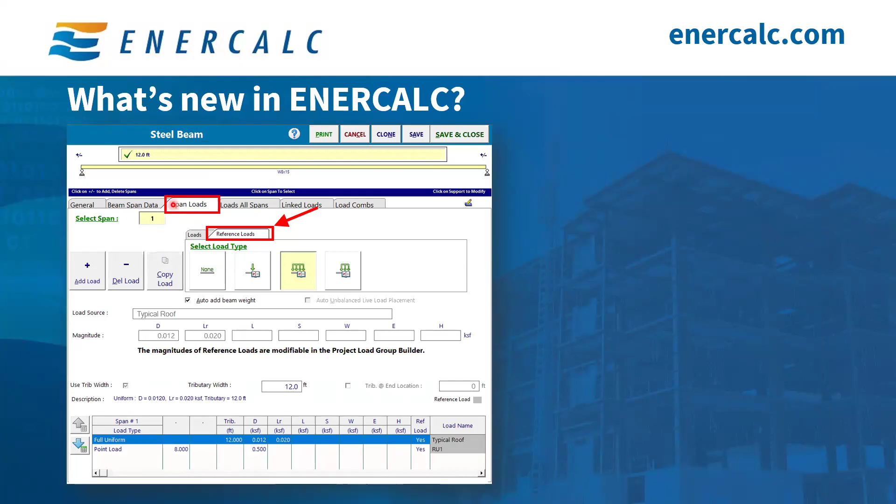Currently, reference loads are supported in the wood, steel, and concrete beam modules, as well as the composite steel beam and the steel beam with torsional loads modules. If you open any of these supported modules and navigate to the span load tab, which is the tab where you input your loads, you will see a new tab right here that says reference loads.

Here we can select the load type. You can see here you can put a reference point load or area load or whatever. So you can select the load type, and that will open the same window that we looked at earlier. So you see we have typical floor load, you have typical roof load, and you can add as many as you want, and you can make them as unique as you want.

And then once you click on it and you add that selected group, then it will automatically populate inside here. And you can see here they're grayed out because you can't adjust them, because they are linked to that master load that you have in the reference load group.

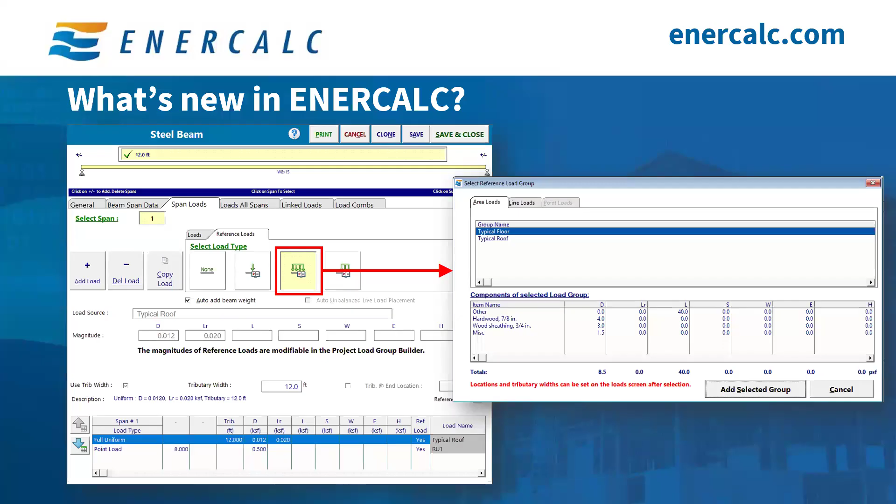And you can simply just retrigger the calculations. The way to retrigger the calculations is the same way that we trigger recalculations for linked loads. You can recalc these calculations in bulk by just clicking on this button right here. So this is, of course, an exciting update, allowing users to create typical load groups that can be referenced across the calculations in their project, and of course, bulk update them in case particular floor loads change or you want to implement that change in multiple calculations.

Another exciting update is the ability to adjust load graphics in some of our beam modules. So steel beam, wood beam, and concrete beam now allow load graphics and labels to be adjusted in the 2D diagram. This, of course, will help users manipulate the annotation so that the numbers are not overlapping and everything is easily legible and you can read it clearly. This is how it used to be, as you can see here, and that's what you can do.

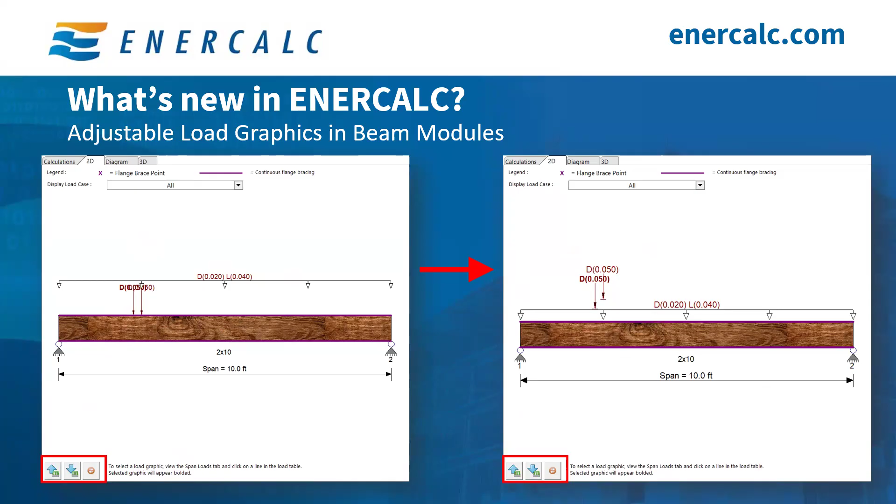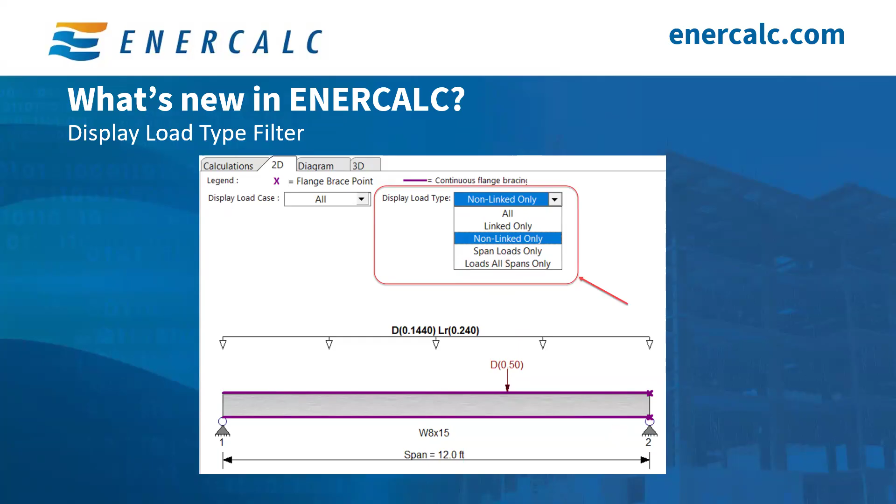Furthermore, we recently added a filter in that same 2D tab that helps the users display the specific load type they want. So loads are grouped by load type. So you can see here the loads that were applied, the loads all span, the span loads only, the non-linked loads, and the linked loads. So you can filter the display here just to show the loads that you want to see if you're trying to isolate a specific group.

Last month, we shared that access to Jack was now available in ENERCALC, and this month we are excited to share another update. The Ask Jack button on the main toolbar now opens a dedicated window, which provides direct access to Jack, the ENERCALC AI support chatbot, without requiring a web browser or navigation to ENERCALC.ai. Jack is trained on ENERCALC documentation and product data, so he's a great resource for quick answers anytime you need them.

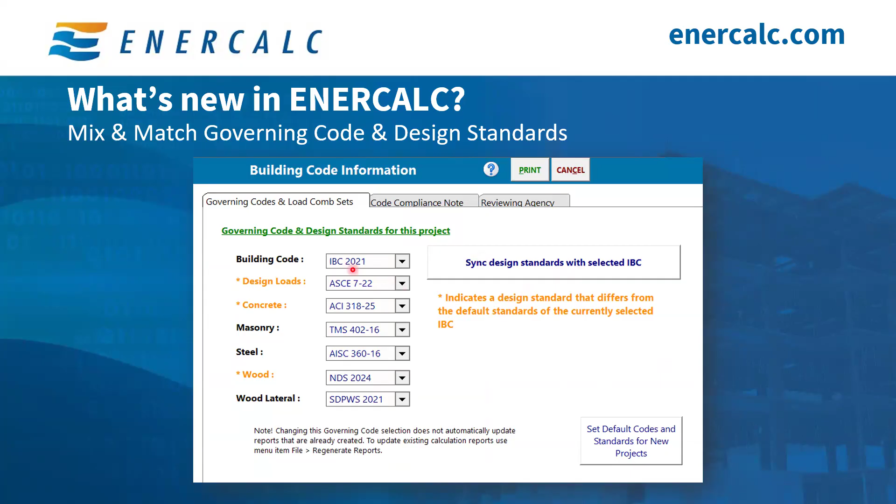We've made some recent updates to the building code information window, including new tabs to keep things better organized and more intuitive. All governing codes and material design standards can now be individually selected, so you can mix and match codes and standards to meet your jurisdiction's requirements. There is also a convenient sync button right here, as you can see, this big button, to bring all standards back in line with the selected IBC.

Another update, of course, we've been talking about this for a while, and I'm still surprised that I still meet people who are not familiar with load linking, but I'm pretty sure most people here who attend office hours regularly know about it all too well. Load linking is currently available in the steel beam, wood beam, steel column, wood column, and general foundation modules. This gives users the ability to automatically link reactions from one calculation to another, and the ability to change something in one member and have the effects of that change trickle down to all of the downstream supporting members.

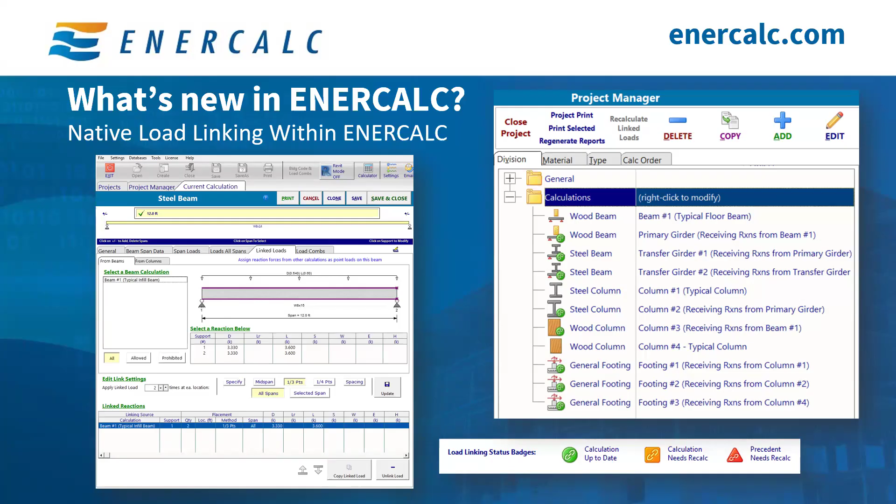If you haven't tried load linking yet and you'd like to learn more about it, we have a YouTube playlist with short step-by-step videos to help you get started, and that's those videos right here. Then we have another video at the very end, which is a full practical example of how to use load linking to transfer reactions from beams to columns, covering both materials. So if you have a wood beam sitting on a steel column, or a steel beam sitting on a wood column, and so forth.

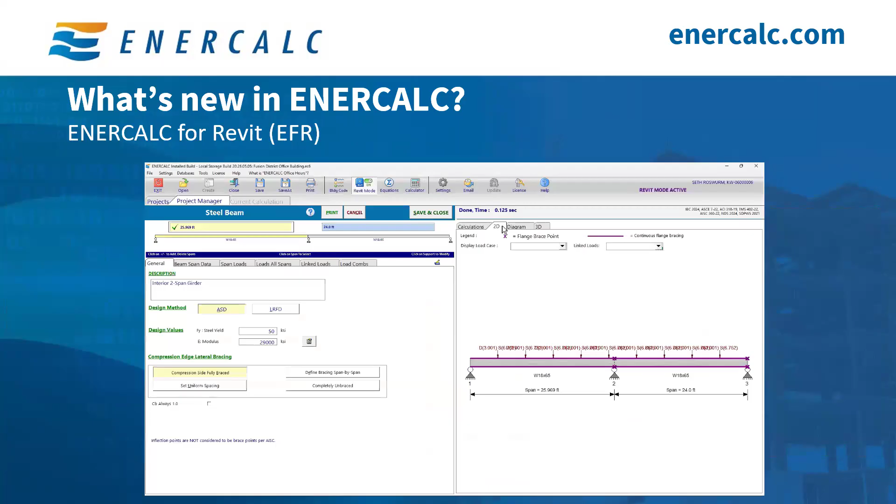ENERCALC for Revit has also seen some new features recently. EFR now includes the wood column module, along with support for engineered wood sections, such as LVLs, PSLs and glulam members. Two months ago, Seth presented on EFR for wood buildings. If you missed that session, I definitely encourage you to check out the recording to see these new features in action.

So moving on to our main event, the focus of our presentation today is the design of composite steel beams using the composite steel beam module in ENERCALC. We'll be covering the module's capabilities by walking through an example together. Here's a quick overview of the capabilities and features of the composite steel beam module. It performs analysis and design of shored and unshored composite steel beams, and supports solid slabs as well as slab on metal deck for composite design.

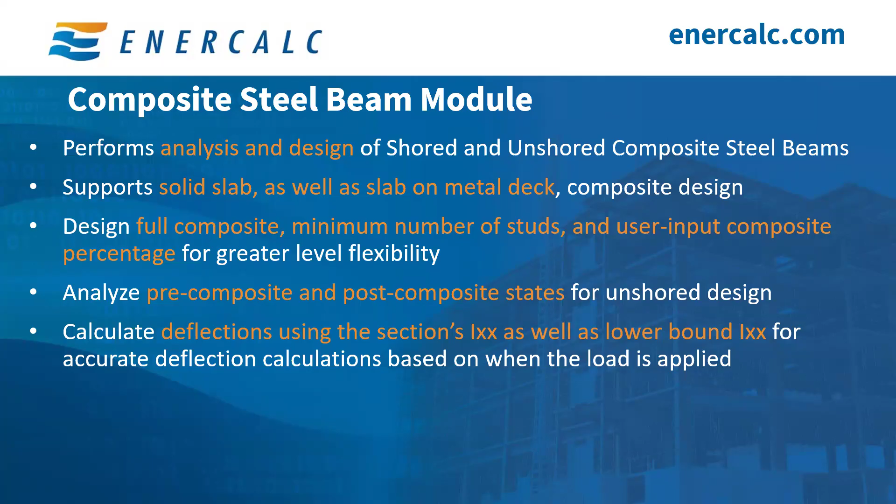It designs full composite, or tells you the minimum number of studs, or the user can input a specific composite percentage they're trying to achieve, just to give you a greater level of flexibility. It analyzes the pre-composite as well as the post-composite states for unshored design, and calculates deflections using transformed section moment of inertia as well as lower bound moment of inertia for accurate deflection calculations based on when the load is actually applied.

So in today's example, we need to design a composite steel beam system with 3-inch normal weight concrete over 2-inch VLI metal deck. So it's a 2VLI metal deck, and the total depth of the assembly is 5 inches: 3 inches concrete and 2 inches metal deck. The other thing is that the deck is perpendicular to the beam, so that's the condition we want to examine.

The effective width for the composite beam is 6 feet, and this needs to be an unshored design. We went through the calculations of determining the effective width, and we will walk through this process shortly as we go through the example, but the effective width is indeed 6 feet. Again, this is an unshored design. The beam span is 24 feet, and the tributary width is 8 feet.

As far as the loads, we need to design the beam for pre-composite loads that will be removed before curing of concrete, meaning this load is not permanent. This is just a construction load of 20 live and 20 dead. Then we need to design the beam for permanent post-composite loads, the service loads later. That would be 40 PSF live and 40 PSF dead.

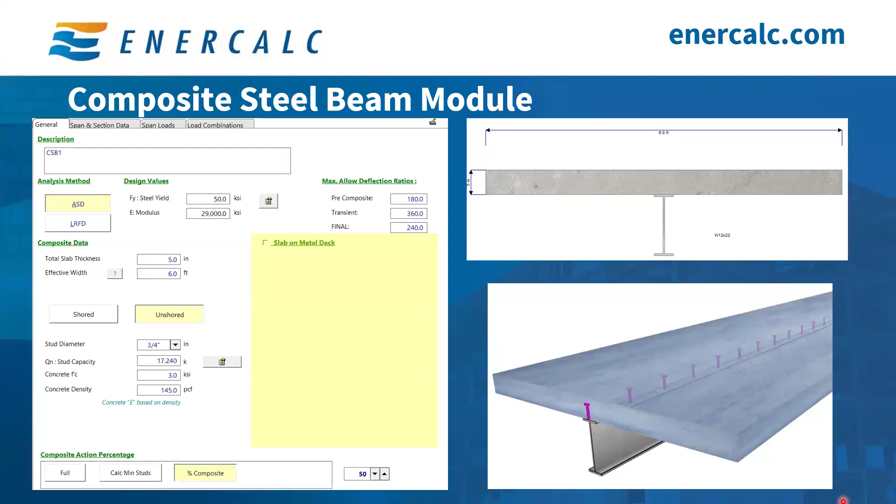Since our example is utilizing a metal deck, we will check this box, of course, and the user will have the option to input their own rib measurements for the deck. This means the user will manually input the rib height, spacing, the width at the top, and the width at the bottom. You can do this, and ENERCALC will use these numbers.

Alternatively, if you click on this button, you will get access to a database of many of the popular metal deck products grouped by manufacturer. In the database, we already have the Vulcraft decks. You can see here Vulcraft 3 VLI, Vulcraft 2 VLI, and it has all of that information pre-populated. So we will just pick this deck since it's already there. But if it's not, then you can just put your own numbers right there. For us, this is the 2 VLI, that's what we need. So we just select it, and all these numbers will be auto-populated properly.

So now we have to specify the deck direction, if it is perpendicular or parallel to the beam, or if it is a transition beam where the deck changes direction. The deck in our example is perpendicular to the beam, but it is worth noting that all the results, as well as the 2D and the 3D visuals in ENERCALC, update in real time as you make changes. Also, the 2D and the 3D visuals are an accurate depiction of the input information.

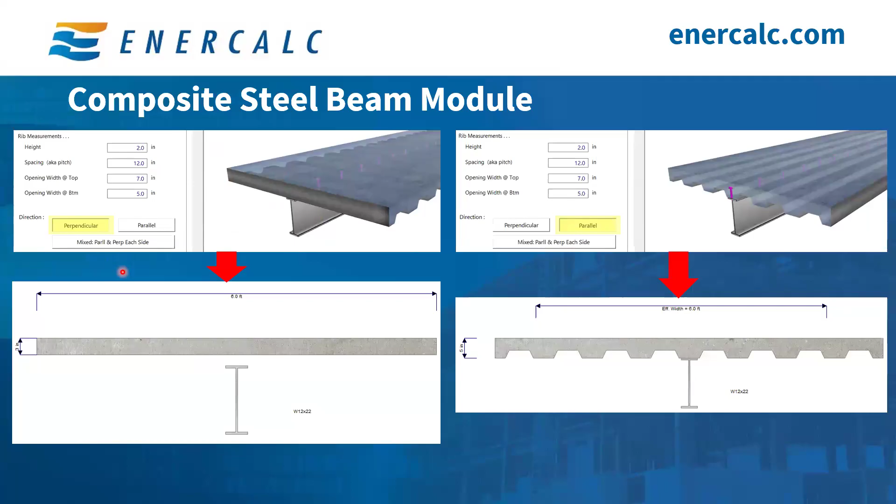So we now need to determine, and I want to just confirm that, because our example is a perpendicular deck. So that's what we're using. We're just clicking on perpendicular; the deck is perpendicular to the beam. So this is the option that we're using in this example.

So now we need to determine if the construction is shored or unshored. If you pick shored construction, then there is no longer a need for ENERCALC to run numbers on the pre-composite state. Because remember, the pre-composite state is to see if the steel beam by itself is capable and sufficient to take the construction loads without excessive deflections or without failure.

So if the construction is shored, then the idea here is that the beam is sufficiently shored that it will not fail. It will not experience excessive deflections. Hence, there's no reason for us to be running any numbers on the pre-composite state, and all that ENERCALC will examine is the post-composite state, the final state after the concrete cures.

Shored construction, of course, is expensive, and most engineers don't design with shored construction for most projects, at least here in my experience, Oklahoma, Texas area. So what we choose here is the unshored construction. Because it is common to have unshored construction, that's what we're using in our example.

So we are going to be clicking on this option because now we want to sequence our load and we want to make sure that we are checking the pre-composite state for strength and deflection. And then once we're done, we will be checking the post-composite state for strength and deflection.

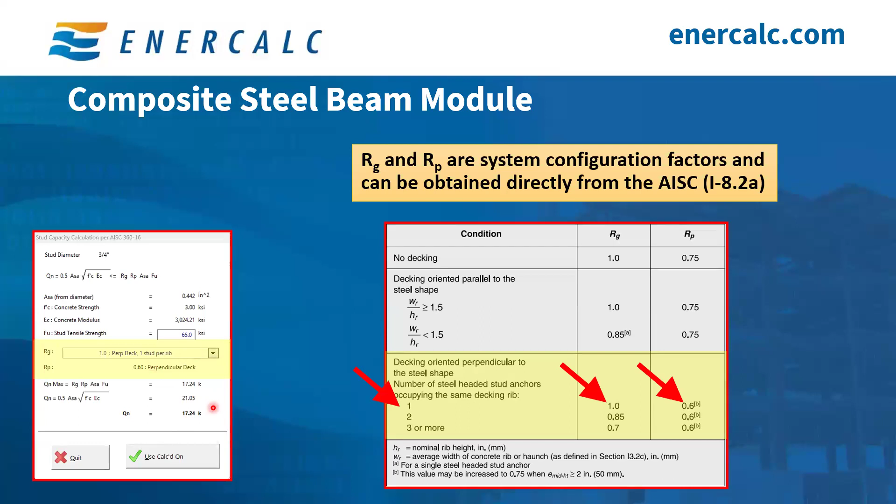So with that, if you see here in our little calculator, RG, you have a drop-down menu that says if it's 1, if you have a perpendicular deck, and you have 1 stud per rib. This is important. Perpendicular deck and 1 stud per rib. So we already have that. So we click on it, and then RP is 0.6. So we're good to go. It does the calculation for you, and pretty much it came up with QN equals 17.24.

If you like this number, then you can click OK here, and it will auto-populate it for you right there as an input. And again, if you don't like this number, if you want to use 16, if you want to use 20, whatever you want to use, you can simply just delete this and put whatever number you want, and you don't have to worry about the calculation.

Last but not least on this tab, we need to determine the desired composite action percentage. We can pick either full composite, so we want to achieve full composite, or you can say calculate the minimum number of studs, or you can say I want a composite percentage, and you can then input that percentage right here, 50% or 60% or whatever you want.

For our example, I want to achieve 50% composite action. So I'm just putting that right here, and this concludes all of the input data that we have here under the general tab, and we are ready to move to the next tab. So the next tab is the span and section data. This is pretty straightforward. From the example statement, the span is 24 feet, so put that here. And now we need to pick a size to start from.

You can select the section type. We will be using a W section, and then from the bottom left side right here, we can select the beam size that we want to use. I'm going to start with a W12 by 22. This is the size that I'm using. If you want more shapes and sizes, you can click on this lookup button right here, and that will give you a larger database. You can see additional types such as C or MC, as well as different editions of the AISC.

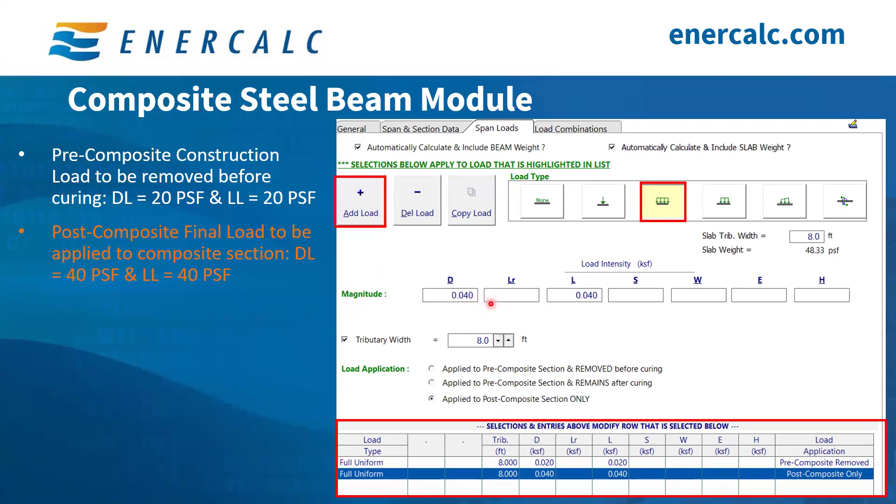So if you're using the project load group builder that we talked about, the new feature that we recently revamped, then know that it can be applied and you can just pick whatever load you want from your reference library. So since we don't have any reference load, we're ready to move on to the next tab, and that is the load combinations tab.

This tab is the same familiar tab across all of the ENERCALC modules. You have strength load combinations, then another set for reaction combinations, and then another set for deflection combinations. This allows the user a great level of flexibility, and of course the user can easily add, modify, or delete any load combination, as well as selectively pick any load combination right here and turn it on and off. So if you don't want it to run temporarily, you can just turn it off, see what the results look like, and then turn it back on and so forth.

So now that we have entered all of the required input data, we can check out the results. Under the summary results tab, you can see all of the critical stress ratios. First, the max bending stress ratio is at 0.718, which is of course less than 1.0, so we're good to go. You can see the composite percentage, which is 50% as we selected, so that makes sense because we forced it to be at that percentage. Then you can see the maximum applied moment and the allowable moment capacity. Then you have info about the pre-composite max applied moment and the pre-composite steel section allowable moment capacity.

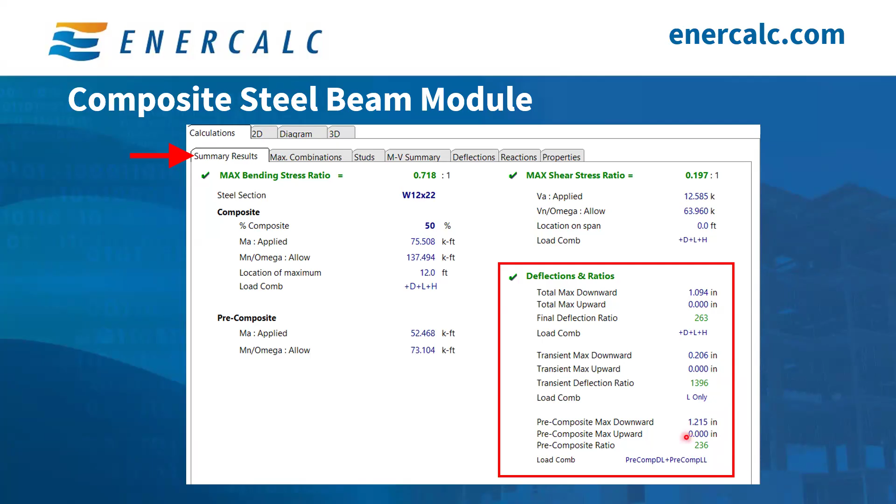And lastly, the pre-composite maximum deflection. This one right here includes construction loads plus self-weight, because we're trying to see how much this deflects under construction load. So there's the pre-composite, and that was L over 180. And of course, it still meets this criteria.

A much deeper deflection analysis and incremental analysis values along the length of the beam can be found under the deflection tab. You can pick pre-composite, total, final composite, or whatever load combination set you want, and you can see here a lot of intermediate values and deflection along the length of the beam for incremental analysis.

Another useful tab is the property tab. You can find more intermediate values, but one value that's very useful is the location of the plastic neutral axis based on the composite action percentage. So for example, based on a 50% composite action, you can see that the PNA is in the flange, and the location of the PNA from the bottom is at 11.898 inches.

So of course, as you go down here, let's say a 40% composite action, your PNA is in the web, and that's its location. So you get a lot of useful information in here. There's all kinds of other information that I'm not going to go through now, but this is a useful tab if you are trying to review or get some intermediate values.

Last but not least is the studs tab. This is the tab that tells you how many studs you need. According to this, we will need 10 studs from 0 to the maximum moment location, which in this case is the midspan, at 12 feet. So from 0 to 12, you need 10 studs. And then from 12 to 24, which is the other half, you're going to need another 10 studs.

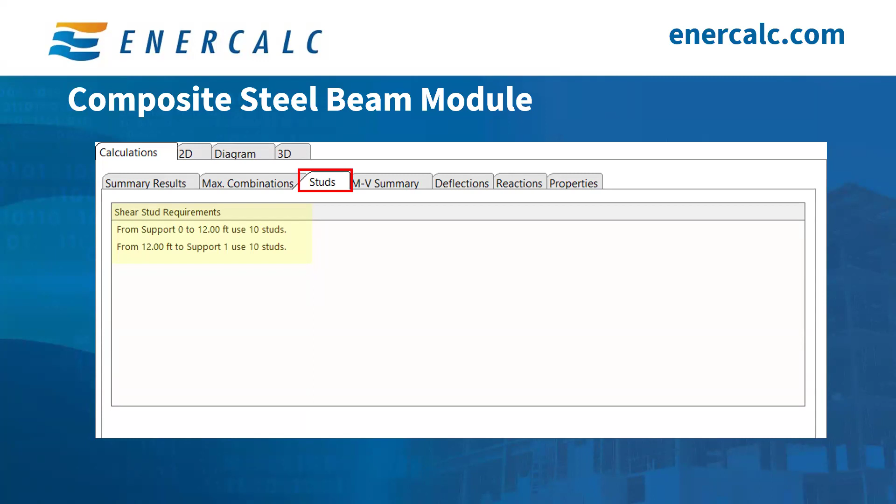It's critical here to note that based on this, we can fit one stud per rib without problems. So our original assumption is correct for the RG. Remember the system factor. RG was assuming that it is one per rib. If you remember here, that's why we got RG of 1, because it's perpendicular to deck, so that's still accurate, and it's one stud per rib.

That's accurate. If you need more than one stud per rib, then that will kick you right here, for example, and that will put you on an RG value of 0.85 instead of 1.0, which will reduce the QN for your stud. It goes from 17 to 14.

But since you have two, probably you're okay, but this would be something that I would rework. Once I realize that my solution is telling me to put two studs per rib, I will go back, change the RG value to 0.85, recalculate QN, put the new QN in, and let ENERCALC run the numbers again to make sure that everything is accurate and your beam still passes and doesn't create any more issues.

So overall, this is what we got. This is the final assembly: 3-inch normal weight concrete over 2 VLI deck. Total thickness is 5 inches. W12x22 works, 50% composite action with 3/4 inch diameter studs.

10 in the first half and then 10 in the other half. And then here, this is the allowable moment capacity, and we were able to achieve the maximum total deflection. It was 1.094 inches, and it's within the L over 240 criteria. And lastly, the max pre-composite deflection, it was 1.21, and that is meeting the L over 180 criteria.

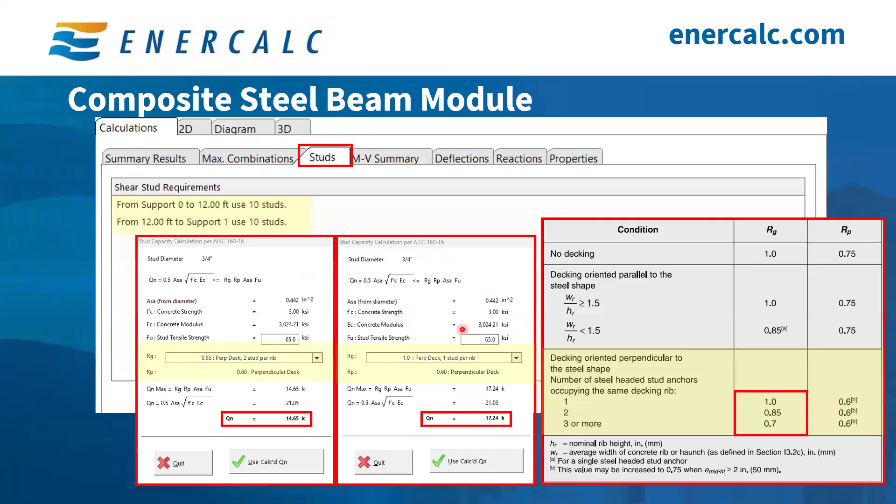So for those who aren't familiar, ENERCALC for Revit will let you basically set slab properties, set beam properties, and then for every beam in that floor system, you can just automatically create calculations on the fly and share those properties across a large floor area. Absolutely. Next question.

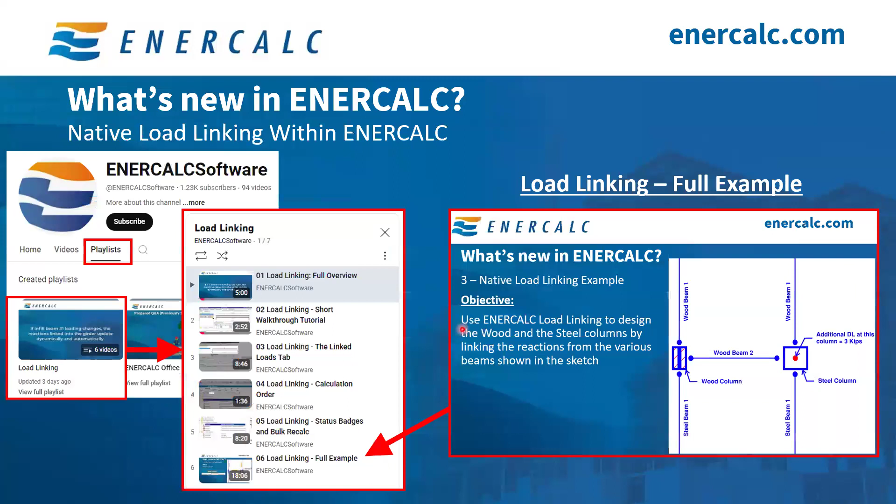For the pre-composite loading removed before curing, I understand removing the 20 PSF live load, but what is the 20 PSF dead load you've selected? What would a pre-composite remains after curing dead load be? Mac, this is a reference directly to your example. Yes. My examples try to illustrate the various ways of using this. So what we have right here, we have separated the construction load from the final load.

So some people say you have a pre-composite construction load of 20 PSF, and this 20 PSF will be removed later, and then we're going to get a new 40 PSF load that's going to stay after curing. Some other people say, well, I don't want to consider it that way. I want to consider 20 PSF permanent from start to end, and then the new load that comes after composite is just an additional 20. Does that make sense? So you can split it however you want.

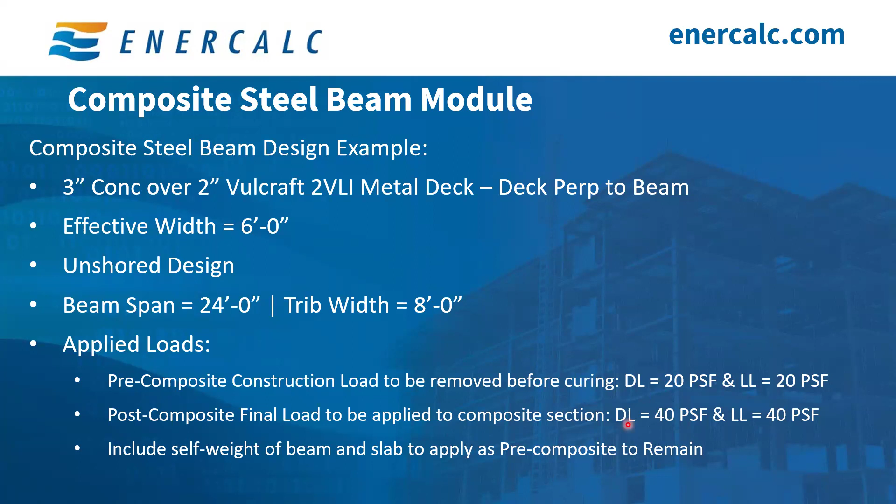I just made a clean split, but in reality, this 20 PSF that's acting as part of the construction load now is really staying forever and it's becoming part of the post composite. But splitting it like this makes it a clean finish. I'm designing for 20 and 20 construction loads, and that's what I run my pre-composite section on. And then for my final composite section, I need to run it for 40 and 40. But you pick whatever option makes sense to your workflow.

Or alternatively, you can also use the pre-composite remains setting. Yes, exactly. Mac is just showcasing the capabilities you have available, whether or not it's applicable in your project. There also could be circumstances where you have staged materials on the slab during curing that get removed afterwards that you want to treat as a dead load instead of a live load. It's just showing that the program has those capabilities.

So slightly related to our question about dead load and beam self-weight and slab self-weight a second ago. More explanation on trib width and slab span. So I assume, yeah.

And Mac, feel free to jump back to the program or jump to slides if you want to. I'm going to assume that this is drilling down on the distinction between slab effective width versus loading tributary width. So Mac, do you want to kind of go at that for a second? Yes, that's exactly what this is.

So from AISC perspective, whenever you have composite beam design, if you have a slab that sits on top of a beam, what is that width that's actually engaged and is part of the composite section? How much of the slab do you get to use in compression to build the composite? How much of the slab is actually helping you and engaging? And that is something that AISC tells you what to do.

You have to use the smaller value of the following, and that is 1/8 of the beam span. So the span of the beam is 24 feet, so you get 1/8 of that, or the distance to the slab edge in case you are at the edge of the slab, or half the distance to adjacent beam from both sides.

So in this case, the smaller number, 1/8 multiplied by 24, that's one eighth on each side of the beam. So that's 3 on one side, and then you have it from the other side, that's 6. Unlike this one, the half the distance to the adjacent beam, half is 4 and the other half is 4, so that's 8. We're required to use the smallest value for what's actually being engaged as part of the composite section.

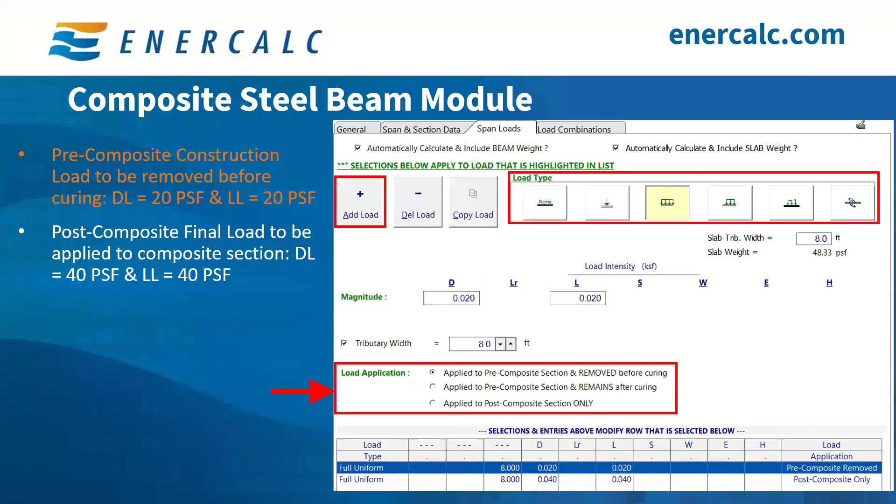Next question. Questions in response to the value chosen for the effective width variable. We just touched on this, Mac. So the question is about that 6 feet, 24-foot span, which would make the effective width 24 over 8 equals 3. That would be for one side of the beam,

but the AISC criteria specifies those three different things you choose from to define the effective width each side of the beam, because in some cases it has to do with distance to adjacent beam, and so that distance wouldn't be the same on both sides. So you calculate for one side, then for the other side, add them together. That gives you the total effective width of 6 feet. Absolutely.

All right, next question. Does the program consider any ponding of concrete under pre-composite deflection? Is there a way to check with extra concrete for a flat floor? So this is an interesting question, and it's definitely something that always comes up when you're doing composite. The ENERCALC composite steel beam module does not explicitly consider any phenomenon associated with ponding or with uneven distribution of concrete automatically on its own.

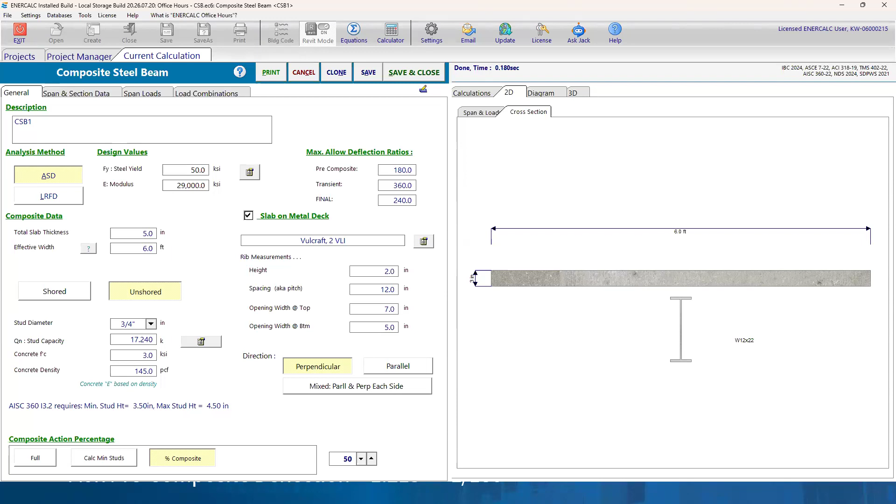You have the ability to auto add self weight. You can use all the different controls that Mac already showed you. If you're concerned about uneven distribution, you can use the built-in capabilities in ENERCALC like Mac has on screen right now, where you can do trapezoidal loads, segmented loads with different magnitudes along the length of the beam. So you have the ability to simulate an uneven distribution if you feel the need to. This module is not automatically doing any of those phenomena for you.

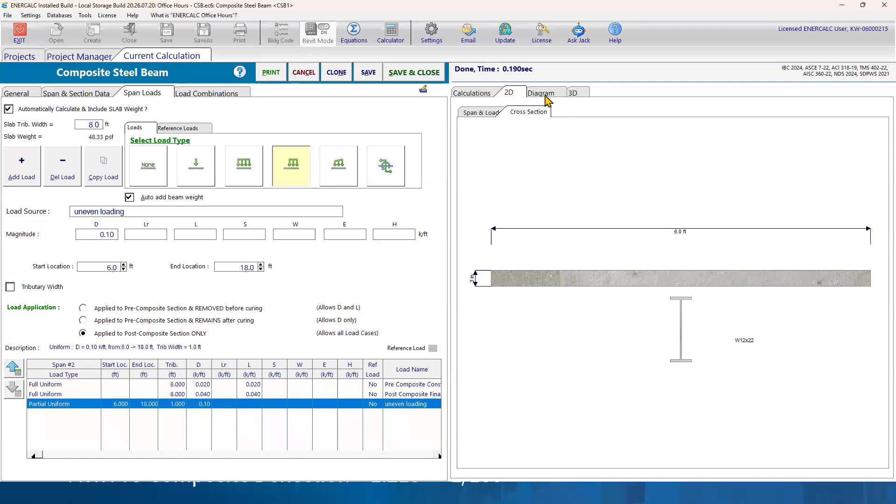Go ahead, Mac, if you want to add more on that. Yeah, I want to show right here, make this bigger. If we can, I'm separating this. You see that? So if you have ponding issues due to that deflection and/or you have uneven distribution due to ponding and you have extra weight of concrete, you can manually simulate that similar to what Seth was saying. I added a partial uniformly distributed load here, for example, to account for that. Or you can do a trapezoidal load if you have a bigger problem and you want to be a lot more accurate.

So ENERCALC doesn't automatically address this. But if you know that you have the extra load and you have the problems, you can just put that extra load as you need to, and you can apply it as applied to the pre-composite section, and it remains after curing. So that'll stay forever.

Yeah, and in most cases, the real secret sauce for avoiding problems like that is camber. Calculate your dead load deflections as accurately as you can during design so that you can specify camber on the drawings. Not too much, not too little, just enough so that you hopefully flatten out and get that neutral. Because there's probably quite a few engineers who've done a composite job and got a panic call from the field like, hey, we're trying to flatten out the camber. ENERCALC itself doesn't explicitly address camber, but you can figure out your camber based on the deflection results that we provide.

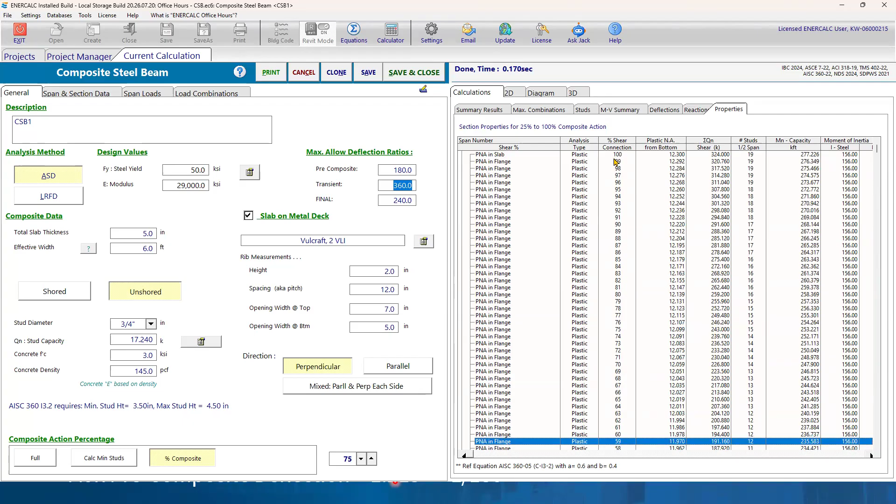And then lastly, you can see this is pretty cool right here. This is the shear connector percentage, the composite action percentage. So this actually shows you everything. I know you didn't ask for it. You didn't ask for it to be 98 or 97, but it's showing you everything. So in our case, at 75, you can see it right here and you can get the values that you need. But if you're curious about what it looks like for something else, you can just go and look at this and see what you get.

Or as simple as changing a number right here and say, okay, well, I want this to be 95 composite, and it'll run the numbers and it'll tell you, okay, well, you need 18 studs now to achieve 95. I hope that helps.

All right, next question. Can we use two span beams for composite steel beam analysis? The ENERCALC composite steel beam module has always been set up as simple span with pinned ends to make sure that you only have positive moment. Obviously, the AISC process for steel composite, which we're implementing here, is focused on that top flange condition where we have shear flow with the slab.

That doesn't apply if you have moment reversal where you get the bottom of the beam in compression. So the ENERCALC composite steel beam module has always been single span only with pinned ends to make sure that you have only positive moment.

All right, next question. Back to the project load creation. For the saved loads, is there a way to save a favorite or similar that you can apply to new projects by default? Yes, with load items, not with load groups, but the engineering team has made a note of that as a feature request. Good question.

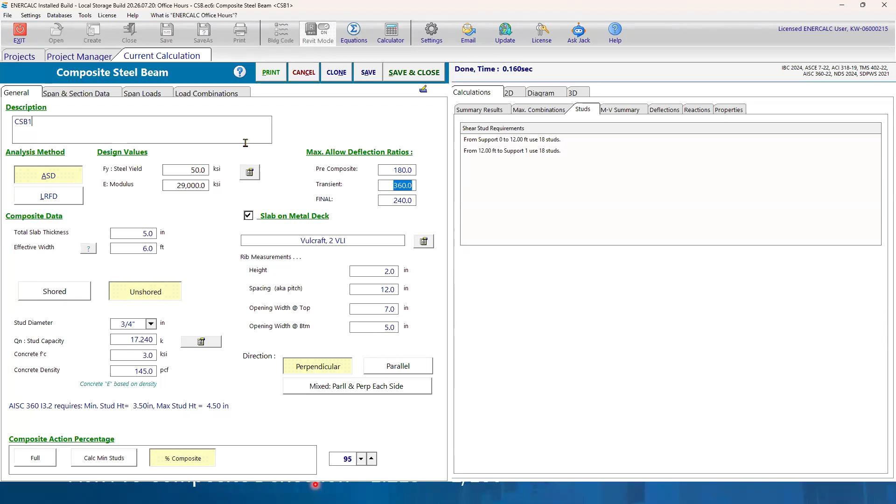Here's another good question. When can we expect load linking integration for composite beams? So, composite steel beam load linking obviously is a different animal than all of the other load linking in ENERCALC because of the sequencing issues where you have your pre-composite loads that persist, loads that are removed. That's on our radar for something that we know customers are interested in. The development team is beginning to study that topic as well as the engineering team. So we'll be sure to keep you guys posted on that whenever we have something to announce.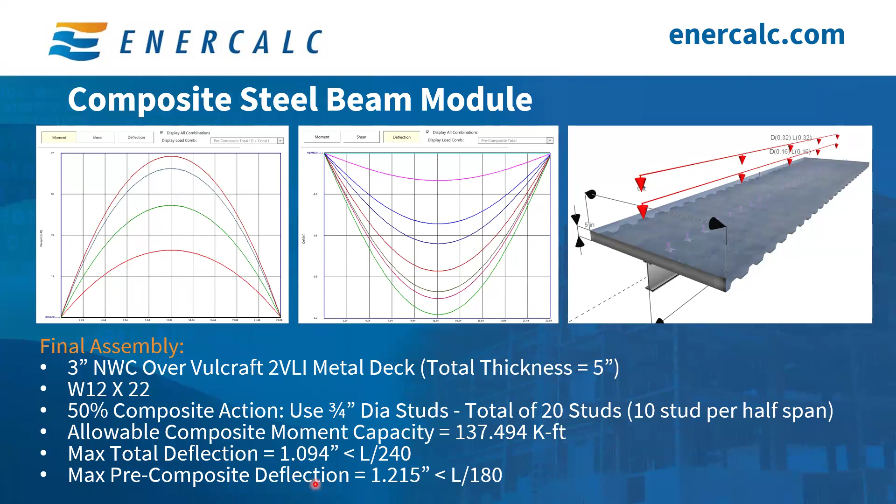All right. Next question. Is it possible to use properties calculated using the general section property calculator in a steel beam analysis imported? Not at this time, no. But if that's something that you have a use case for, we don't want to just like a knee jerk, oh, send a feature request. What really helps the engineering team a lot is for us to hear a really detailed explanation of what your use case is, so we can understand what problem you're trying to solve. So yeah, if you have specific use cases, we definitely want to hear about that.

I think we've been asked that question before related to built up steel sections where someone's wanting to do a general section property calculator and then perform robust AISC section capacity calculations on an arbitrary section. That's a little bit of a difficult thing to do, but feel free to reach out to the support team to get more information about that. There is an existing feature request along those lines, but it helps the engineering team a lot to understand your use case. I want to add one thing to that question, is that there is no way to automatically import it. But if you have, like, those are the standard sections, AISC standard library.

But if you have done some work on a general analysis module, for example, and you figured out you need an IX of something or whatever, and you have information and you have a built up section, you can just get right here and click on user defined, and you can create a brand new beam pretty much where it has all of the information that you want to examine. So you can create your own beam with its own IX and its own area and all of that information that you need, its own depth.

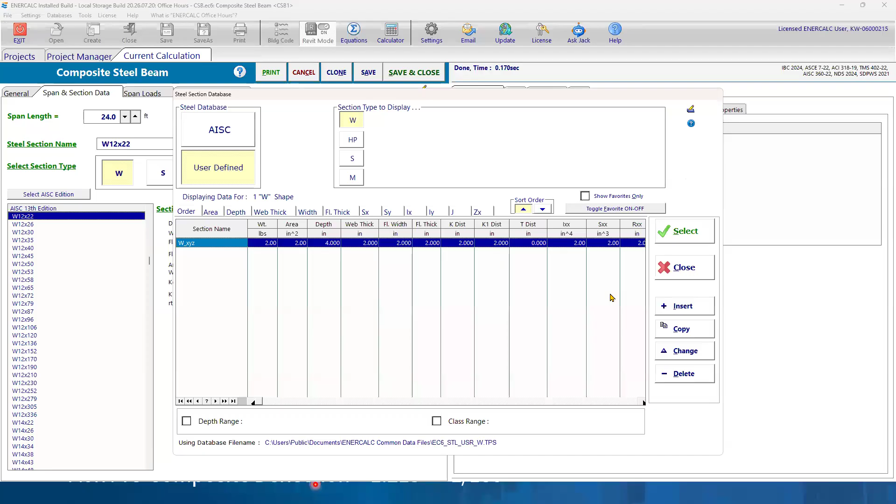So this gives you some more flexibility. And again, as Seth said, we would like to know a little bit more details on what you're trying to do, but this might be also helpful if you just create your own beam right here. Once you know your IX and stuff like that, you can create your own beam and then have ENERCALC examine it. Or the composite steel module can run the code checks on it.

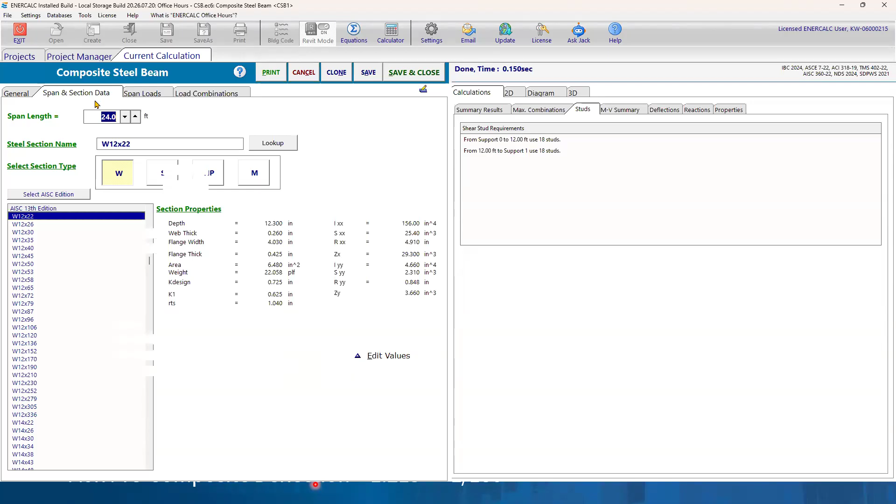All right, next question. Can you explain the pre and post deflection again? So post construction, will the actual deflection be the added numbers that were displayed pre plus post? So just briefly revisiting that topic of loads, when Mac was on our loads tab, there's essentially three different categories of loads that you can apply, and the deflections are calculated accordingly using those same approaches. So you can apply loads that are on the beam pre-composite from the very beginning and they remain permanently. You can create loads that are pre-existing on the pre-composite section and they are removed in the final post-composite condition. And then you can also apply loads that are only existent on the final composite section. So the deflections are calculated along those same lines.

So the pre-composite checks that we're performing, basically the concrete is wet, right? And so it has no capacity, you have no composite action. So the steel beam itself has to be adequate for all of the pre-composite loads that you place on the beam. So all the dead load you place, the self-weight of the beam itself, the live loads that you place during construction, the bare steel beam has to handle that. And so those are the loads that we use to determine the pre-composite deflection that the beam undergoes, right?

And then when you have your post-composite condition, now you have a composite section with capacity of the concrete and capacity of the beam. And so you're using the plastic neutral axis. We've got this composite moment of inertia for the section, the transformed section. Under those conditions, then the beam is going to be subject to deflection caused by loads that were there from the beginning and persisted into the permanent condition, and loads that were placed only in the post-composite condition. Mac, is there anything you want to add to that? Is that a decent overview of what's going on there?

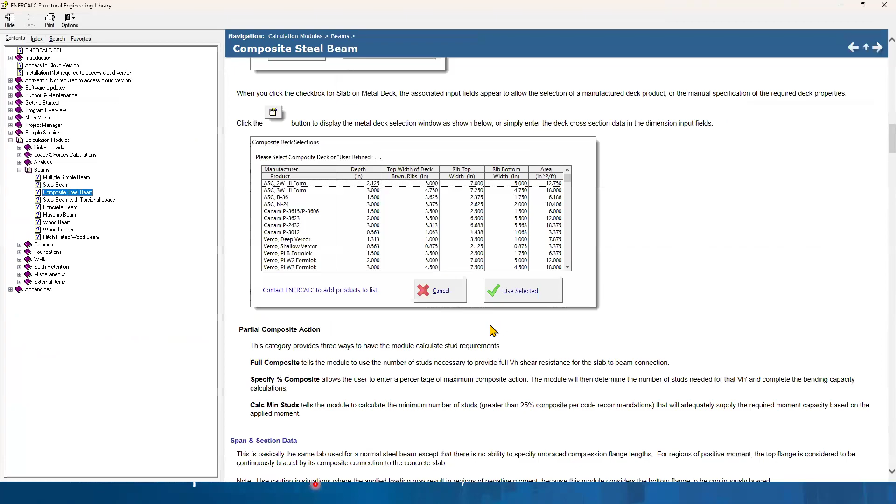And if you click on this button right here, this is useful for all modules. If you click on this button, this will automatically take you to our help page for that module. And it has a lot of good information, but the part that I want to highlight is this. This is a written description of the three. So those are the three applications. You can read the description here. If what Seth and I said confused you more, then maybe reading it right here would be the easiest way to understand it.

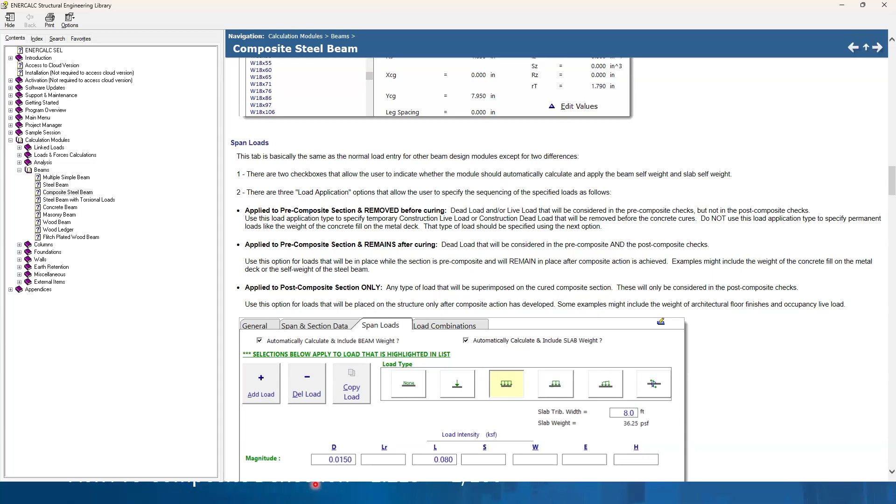All right, next question. Does the optimum design always turn out to be that the beam spacing is the same as the effective width? It's very difficult to generalize that because there's so many things that can vary from project to project. That's the interesting thing about that AISC formulation: it includes not just the span length, but also the spacing throughout the bay, thickness of the slab, and lots of different things. So it's very difficult to generalize and say for certain this is the optimal effective width.

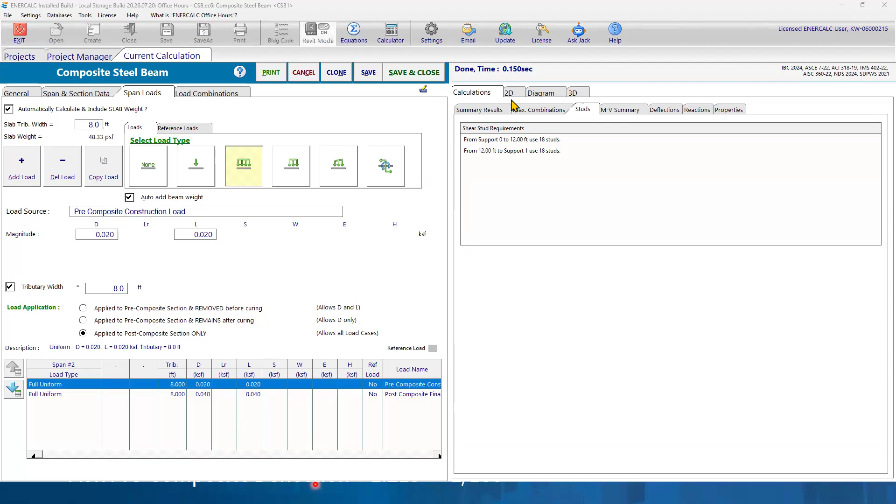It depends on how thick the slab is, how much bending capacity you're getting out of the slab, how far out you can stretch your beam spacings, how much depth is available for your beams, and so on. So there's a lot of different factors. That's more of an engineering judgment and experiential thing than a software thing. Yeah. And in our example right now, actually, it's not effective.

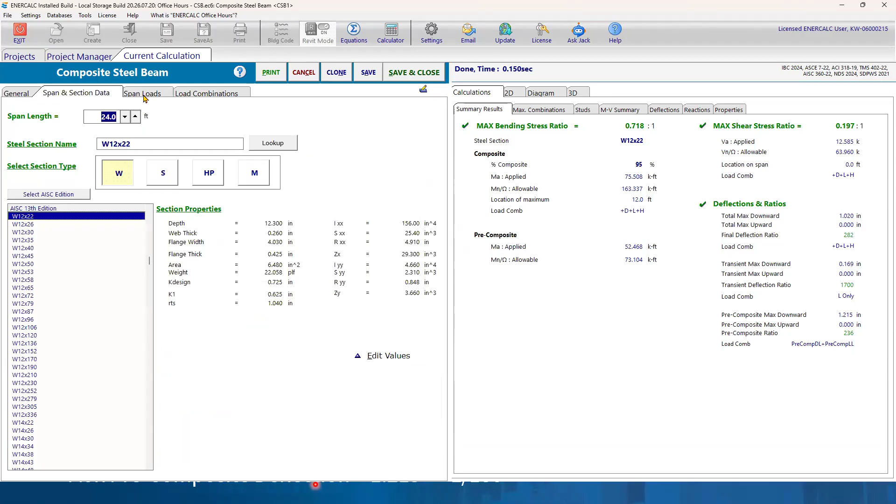It's not the most optimal to keep the tributary and the effective width the same because the effective width right now, it's only 6 feet of the slab that's engaged, but the beams are spaced at 8 feet, and I'm still at a decent capacity. So in my case, if I made them 6 and 6, I would have been more conservative. So I don't think that the two are tightly related as much as you have to look at the overall geometry and the span and the loads overall. Exactly. They're not always tightly coupled.

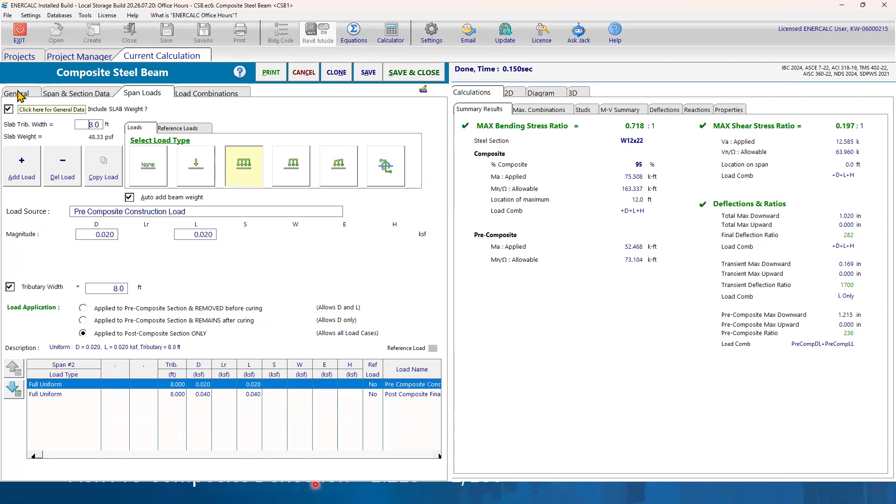In my experience in designing steel composite floor systems for everything from office buildings to heavy commercial and industrial uses, a lot of times when you're using steel composite, you're getting more work out of the slab. And so oftentimes you're going to stretch out that beam spacing and let the slab work a little bit harder. And so in those cases, it's actually a little bit rare to get an effective width that reaches all the way out to the same as your tributary width. Typically, your effective width is going to fall

a little bit less. And the reason you're able to stretch out that beam spacing is for two reasons. Number one, because it's a composite slab that has a lot more capacity. And then number two, because of the composite action you're getting from the slab on top of the beam via your stud shear flow.

All right. Circling back real quick, Mac, to that pre-composite dead load. For pre-composite loads, we used 20 dead load and 20 live load. Know that the 20 live load is construction loading. What is included in the 20 dead load that will be removed prior to curing? Mainly just showcasing that that's a thing you can do. You could envision situations where that's true. Let's say you're pouring concrete and it's 18 degrees outside, but somebody specified that you have to wet cure

the slab. You could end up with a situation where you've got wet burlap and then 12 pounds a square foot of insulated blankets on top, and the engineer wants to consider that dead load instead of construction live load. You've got the option to stratify that in your calculations and say, some of this is dead load, some is live load. It gets factored accordingly, but it all gets removed when you cure. Basically, just showing that you have the granularity to do that in your calculation if you need to. If you don't have an application for it, then that's a zero. Yep.

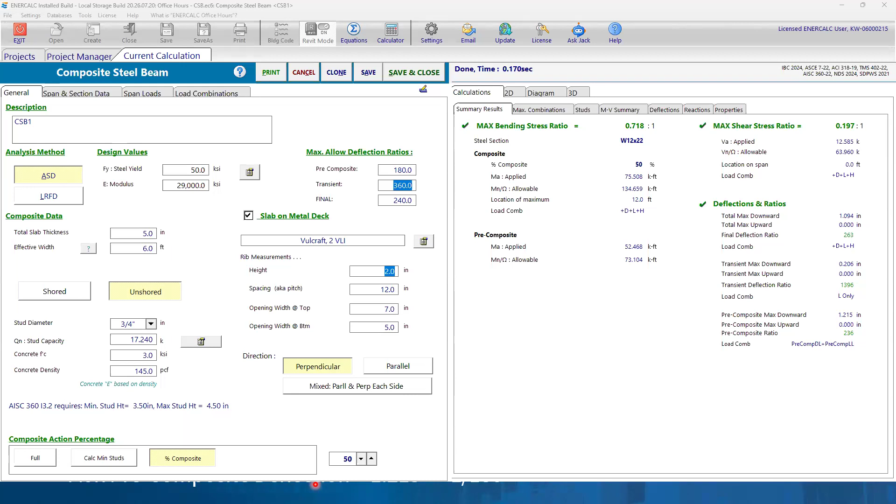Any considerations to cover British, South African, and Indian standards? We always have our ear to the ground to see what the demand is. So, the engineering team does track the demand for other design codes.